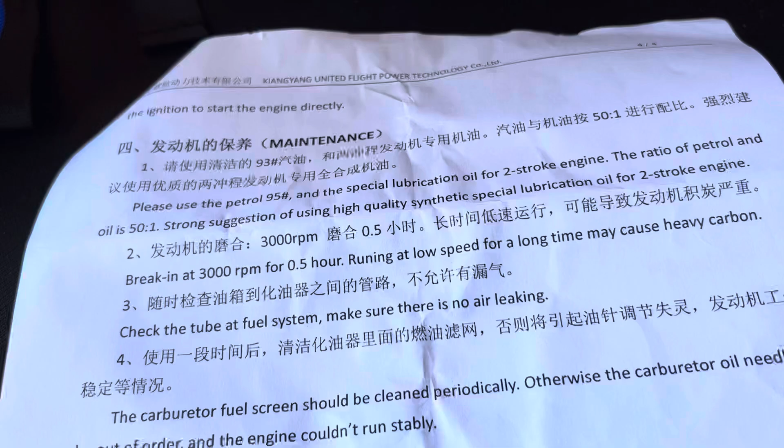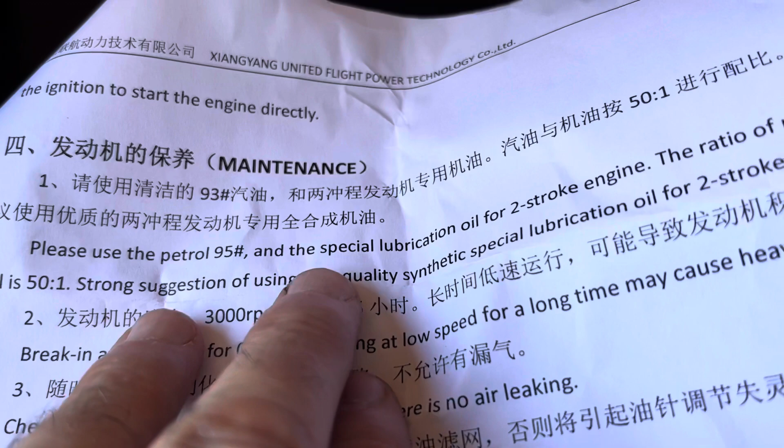Let's go over break-in real quick. You'll notice that you need to use quality gas. My gas is high enough octane, and I also use ethanol free. Then you want to use a special lubrication, so synthetic is good. So for a two-stroke engine, and we're going to talk about that in just a second.

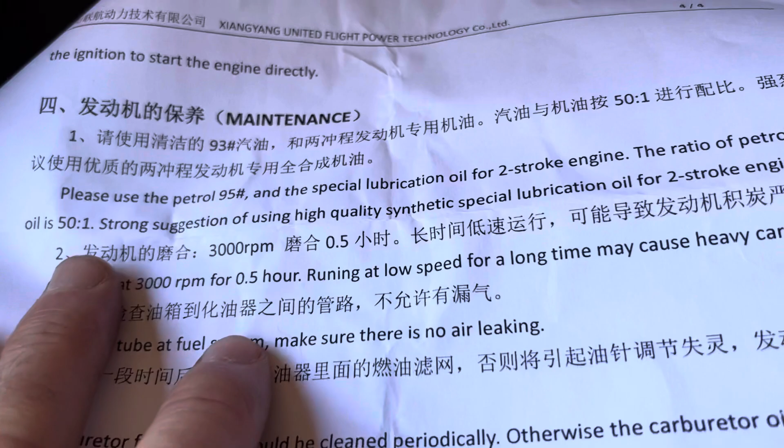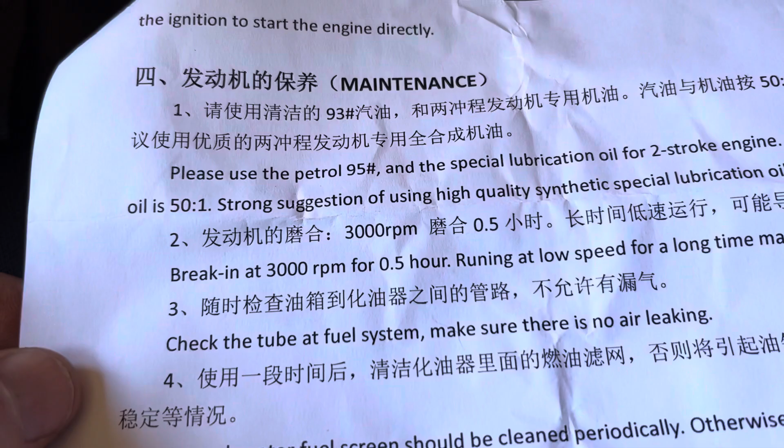The ratio of gas to oil is 50:1, they say, but if you read the DLE170 manual that's online, they say 30:1. So I went with a more conservative measurement, and I'm doing 30:1, at least for break-in. Now I may go to 50:1 because that's what my Vittorazi 185 takes, and that way I don't have to have two different mixes for two different paramotors, and we'll see how that works.

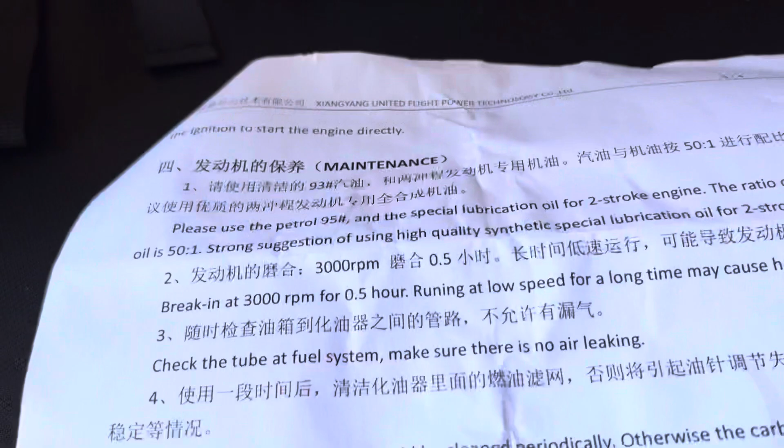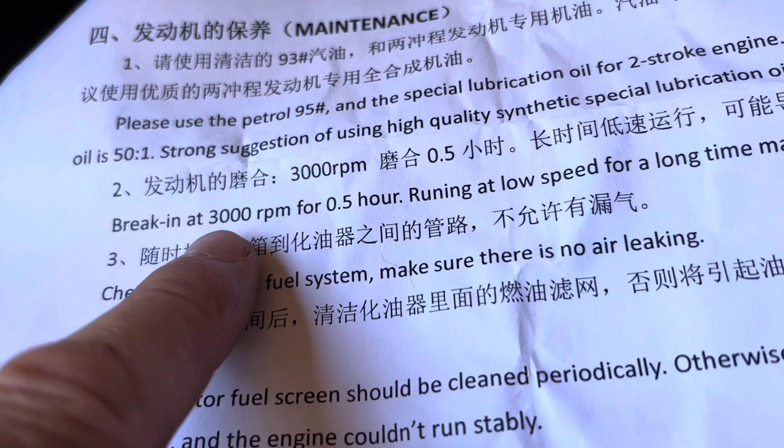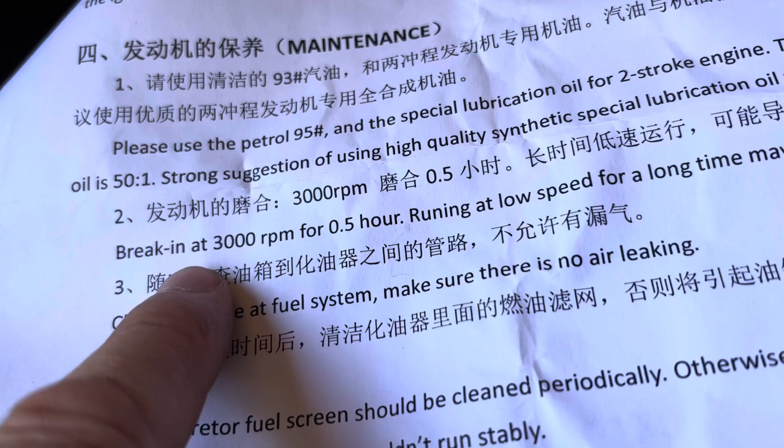I said that max RPMs for this thing to get the 17.5 horsepower was like 7,500 RPMs. Well, we're going to be doing not quite half of that for the break-in. Now you would not want to go for a half hour. I don't think they're saying keep this thing at 3,000 RPMs for a full half hour in one long break-in session.

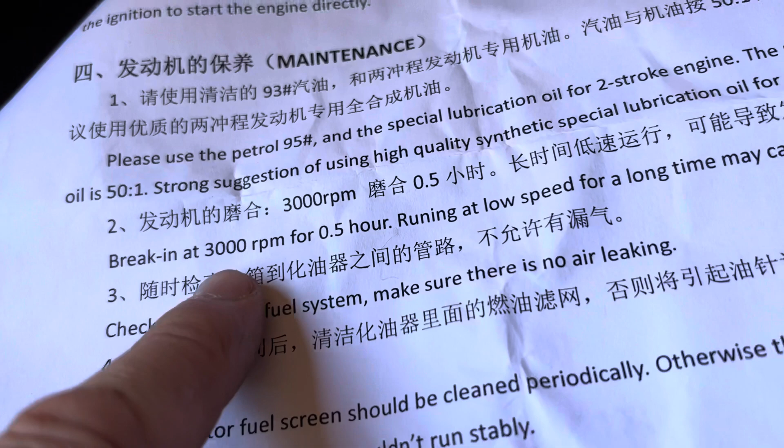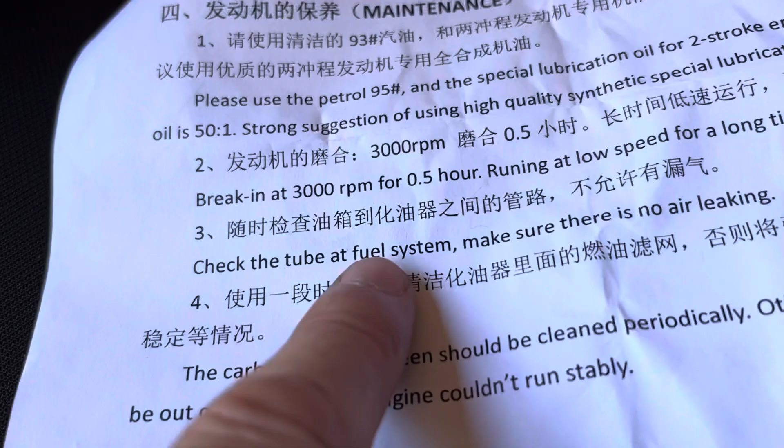What I did is exactly what other manufacturers recommend: I did 5-minute increments. I would rev it up to about 3,000 RPMs and let it cool down, 3,000 RPMs, and I'd do that for about 5 minutes going back and forth. Then I would stop, and as it cooled down, I would check everything. I live in Texas, and I don't want this thing to get too hot and overheat, foul a plug, or do damage to the paramotor.

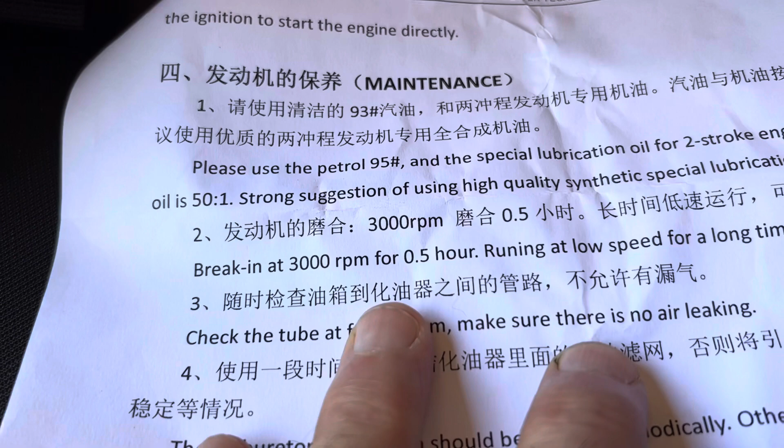So again, I don't think it's a good idea to run this thing when you first receive it at 3,000 RPMs for a half hour without checking and making sure nothing's vibrating loose.

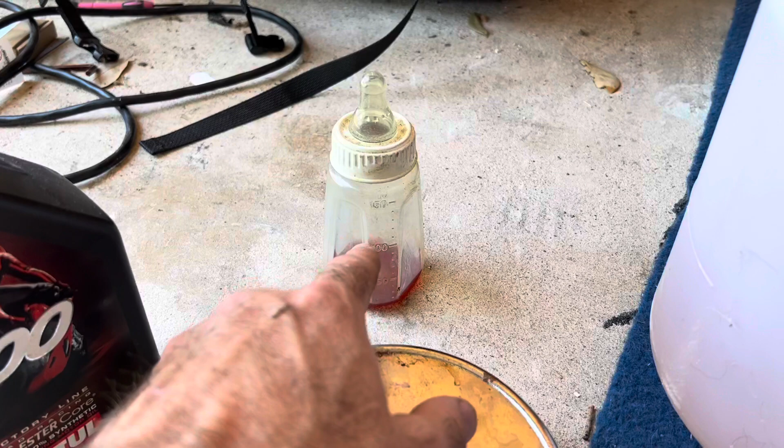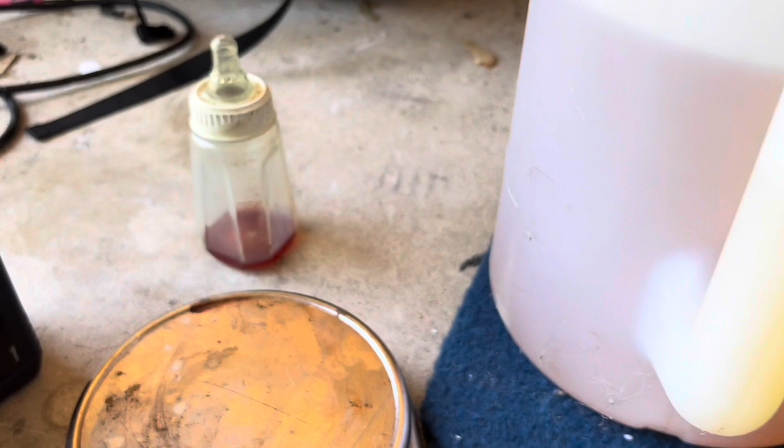You'll notice I have a little baby bottle right here. You can get your gas in your container, and I recommend only mixing the amount that you're going to use. That way, if you need to use that gas for something else that doesn't require premix, you haven't wasted it. So if it starts to go bad, you could pour it in your car as long as you haven't mixed it. You don't want any oil in a standard car or 4-stroke engine.

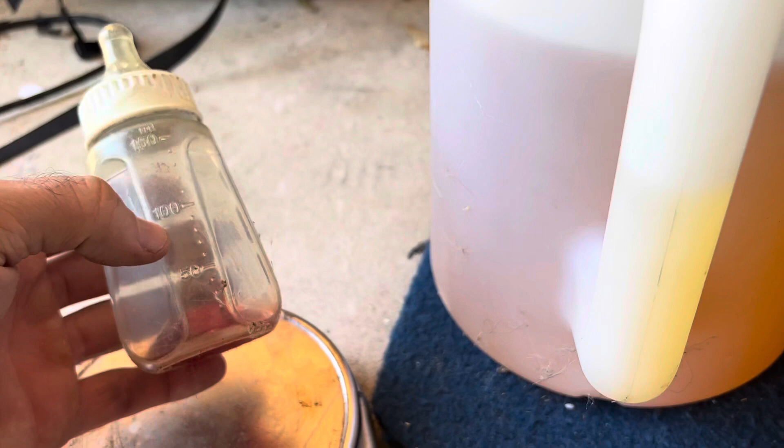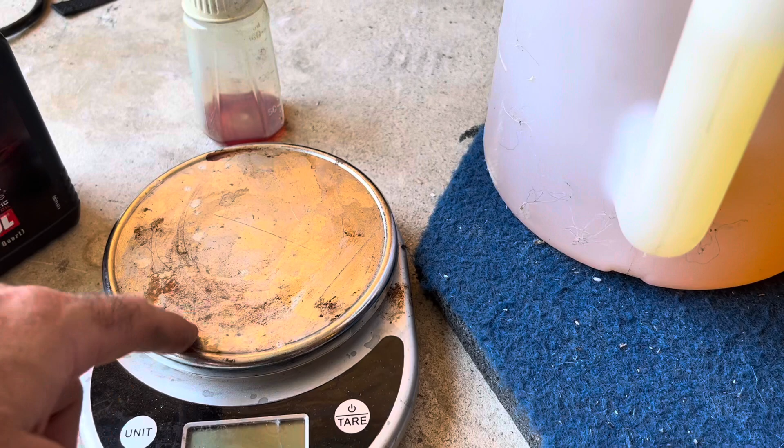You'll notice this has the milliliters on the side, but that's not 100% accurate. It's better to use a scale and measure it out in grams. I found that's a much better way to get your true measurements. But sometimes you have to use something on the fly, and that's what I've used before. But again, you want to use some sort of synthetic brand.

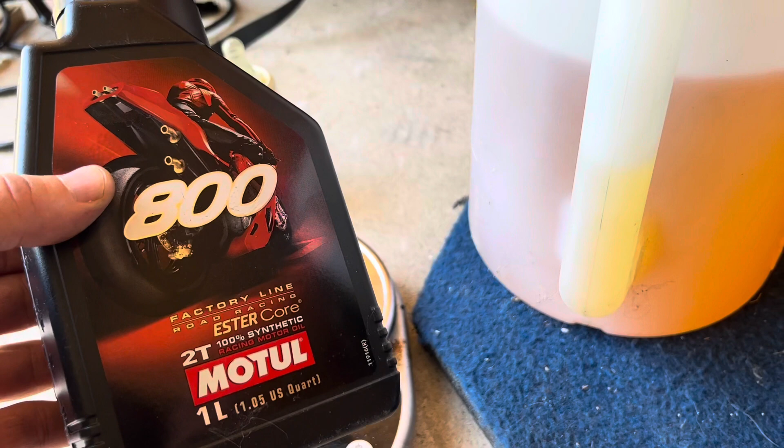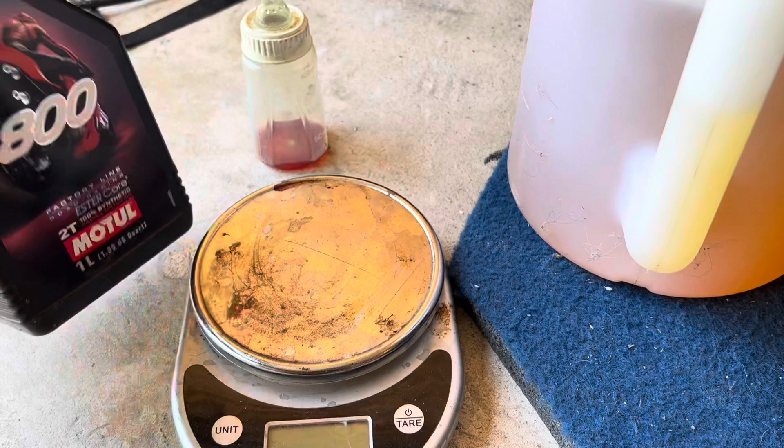This is the same product I use on all my Vittorazi engines, so the 185, and when I had the Atom 80, even when I had the Top 80, I used Motul. The reason I use Motul on everything else is because it's all Vittorazi, and it would invalidate the warranty if you use any kind of oil that's not recommended.

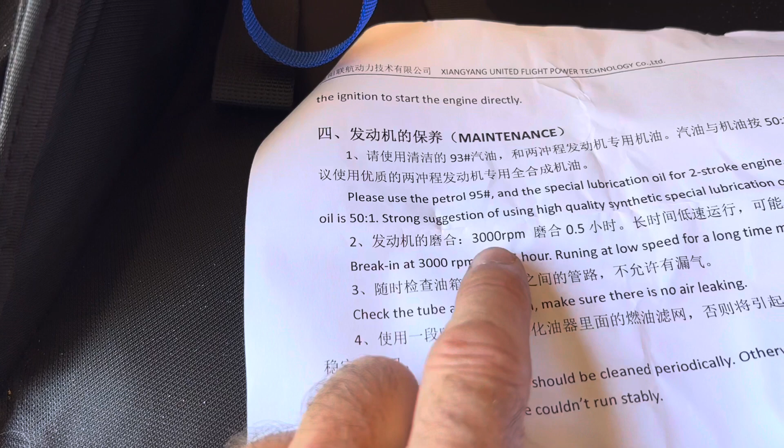So again, do your break-in in 5-minute increments, and then let it cool down, go do something for a couple of minutes, and then again, you can come back to the 3,000 RPMs and then let it cool down. And I really wouldn't do the 3,000 RPMs for the full 5 minutes. Maybe for the first part, just let it get warmed up, and then do 3.5 minutes at that RPM, and then come down to just a little bit above idle, maybe a quarter of the speed.